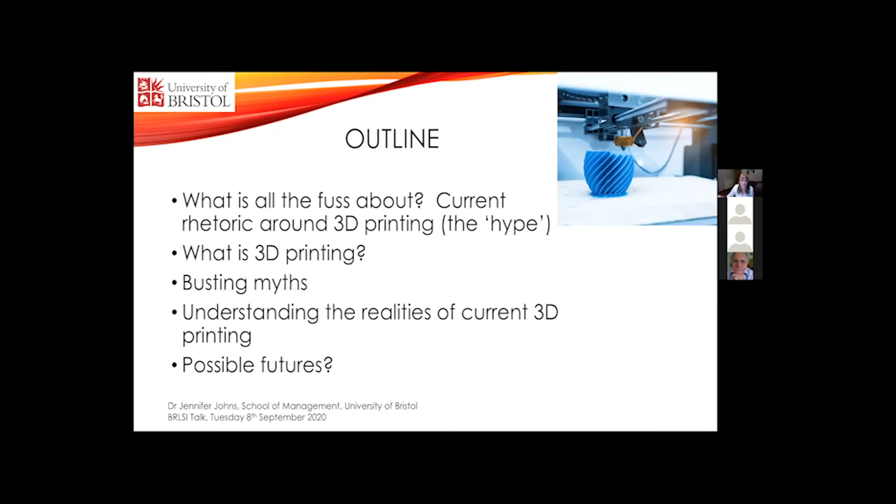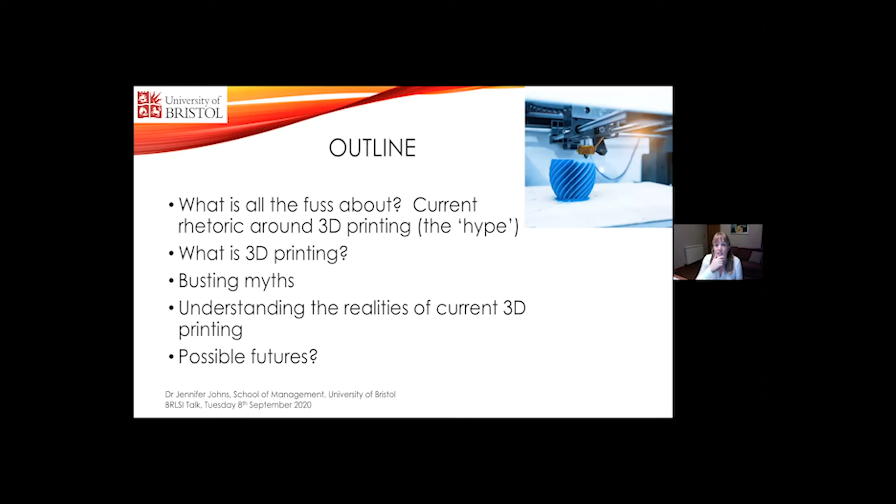There's no right or wrong answers, I think, around this. All I can do is give you my perspective based on the work I've been doing. So I want to present to you kind of a realistic picture then of what's happening in 3D printing across the different types of 3D printing production, which I'll also explain. Kind of woven through that will be the real general question about what are the futures that are facing us as a result of use of this technology.

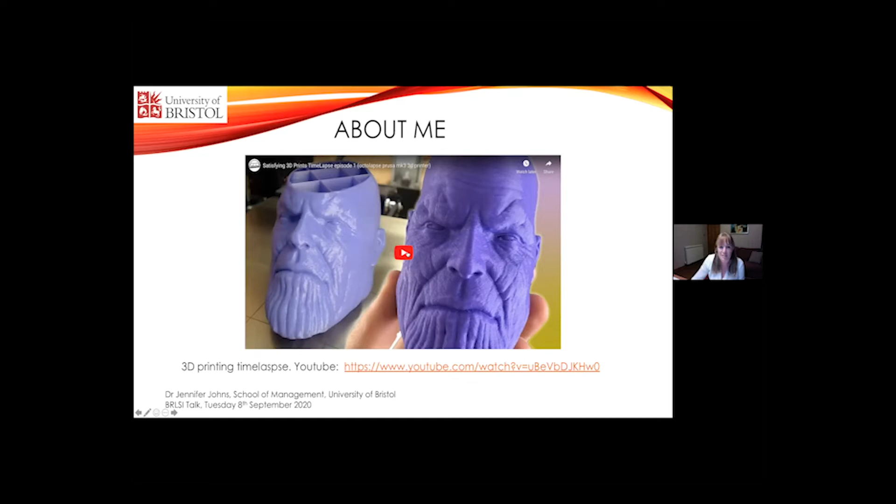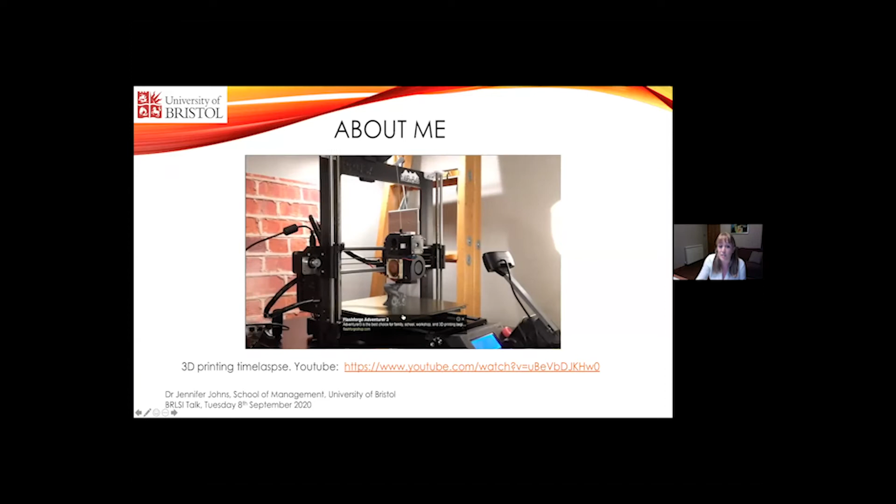So I'm going to show this video now, which we've tested and does work, but I'm going to mute it. It's going to show you some plastic 3D printing under time lapse, so going much faster than it does in real life. But during that time, I'll just tell you a bit about the research I'm doing and how I've got there. So I'll mute this, and it's going to show a 3D printer. This actually is going at the speed that it does in reality. You can see the bed moving, and that's the speed at which it printed, and this is now the faster time lapse.

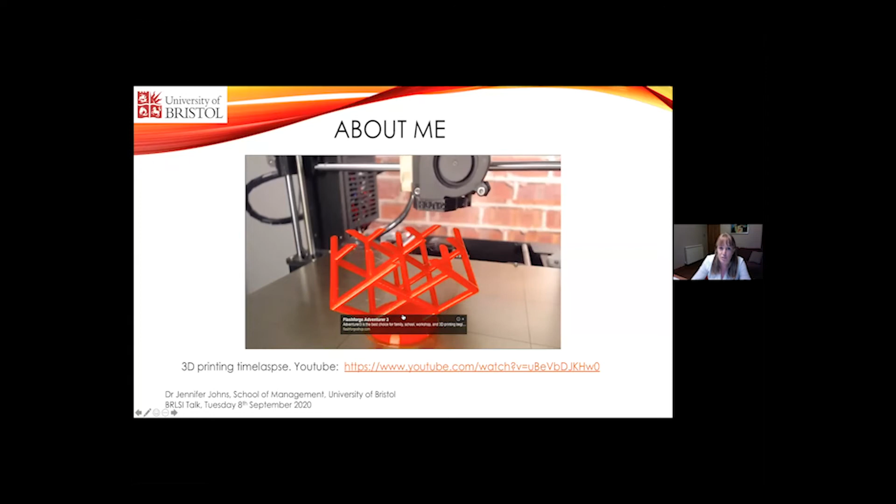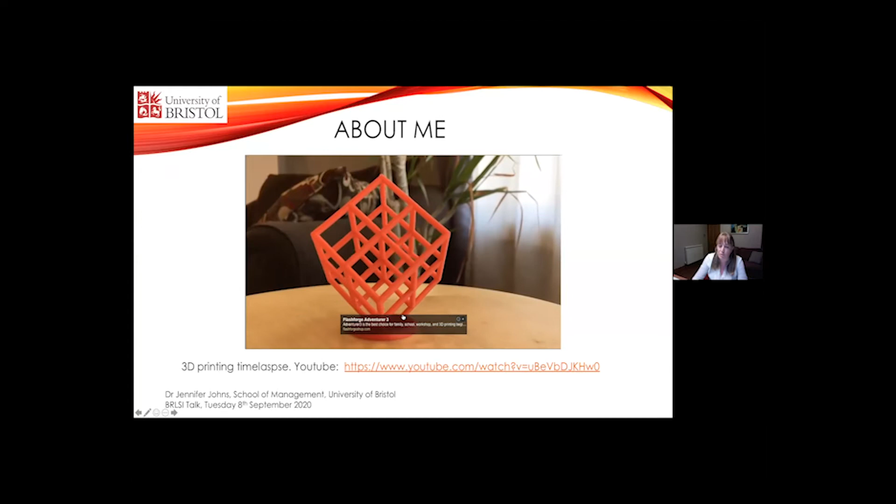So Andreas introduced me, and I teach international business. My background actually is a geographer. So I do work on globalization, looking at firms, how they internationalize in their operations. My PhD was looking at creative industries, at the film and TV industry, looking at the power relationships between different suppliers. And much of my career I've spent traveling abroad, interviewing firms and looking at different industries and understanding their dynamics.

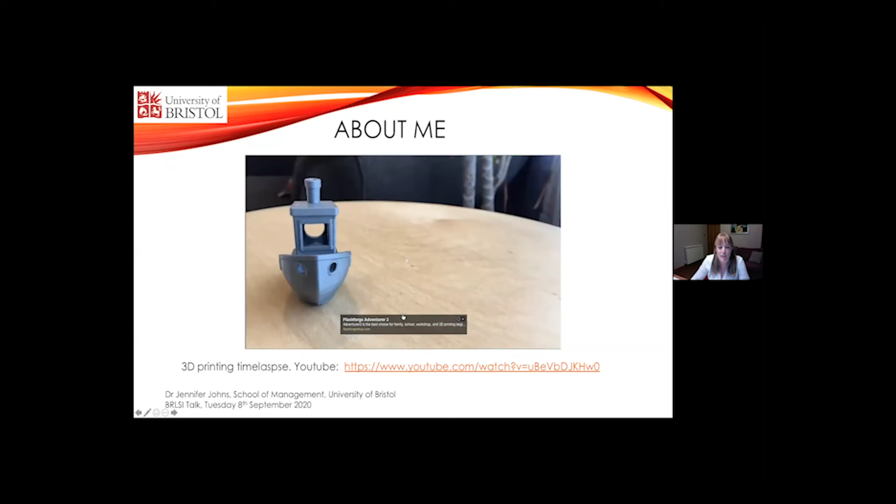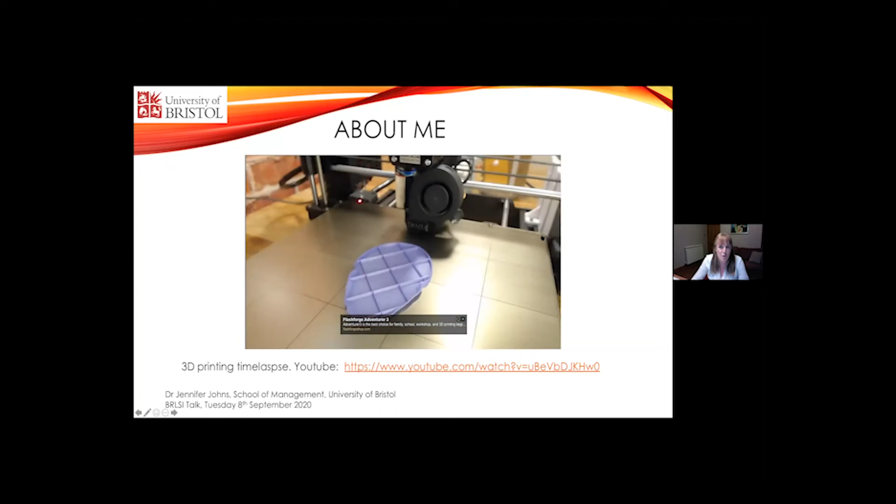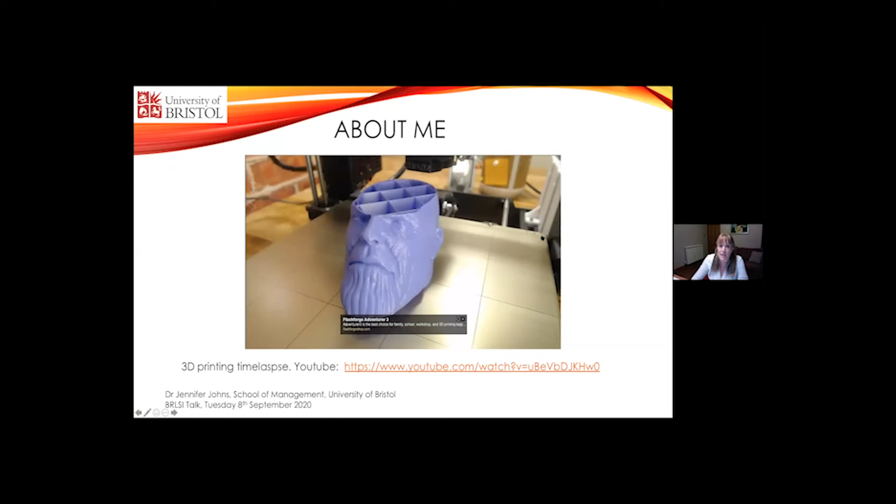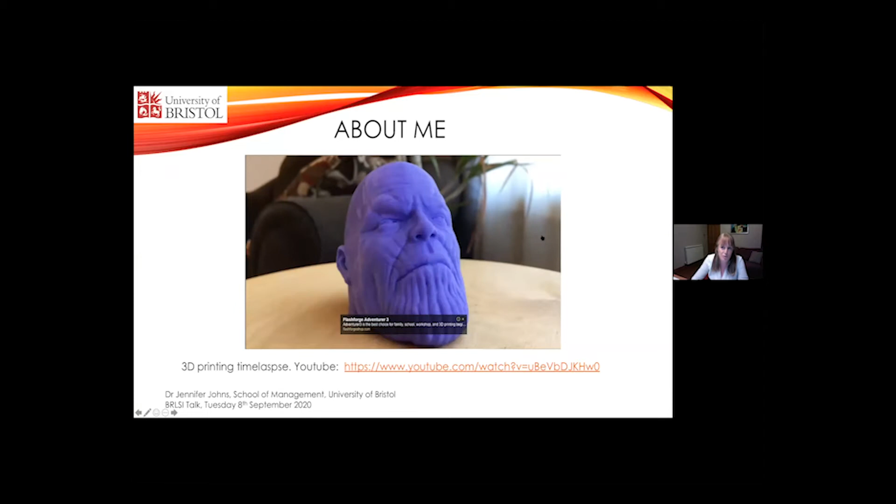I then started working in a management school, moving from a geography department, and became interested in entrepreneurship and worked with a colleague looking at makerspaces and fab labs, which, if you've heard of them, these are democratized spaces where people can go and use digital technologies, one of which is 3D printers. So I did some work on that, but then became really interested in the technology itself and became much more aware of the more dynamic changes that were happening in industrial 3D printing. So I went from the smaller scale machines that you can put on your desktop and use at home, right through to £500,000 machines that are used in industry.

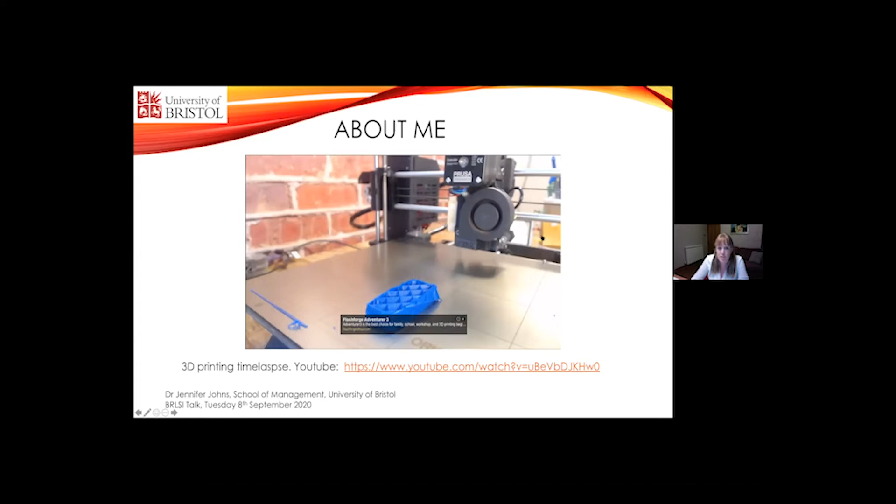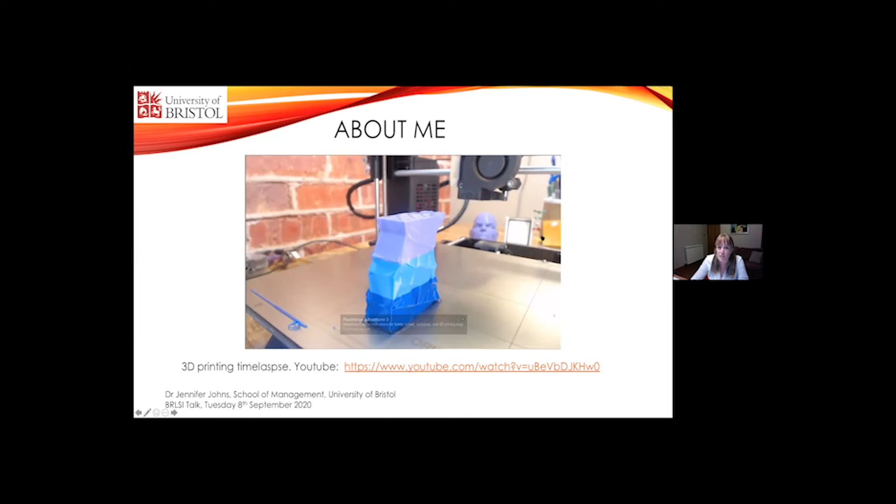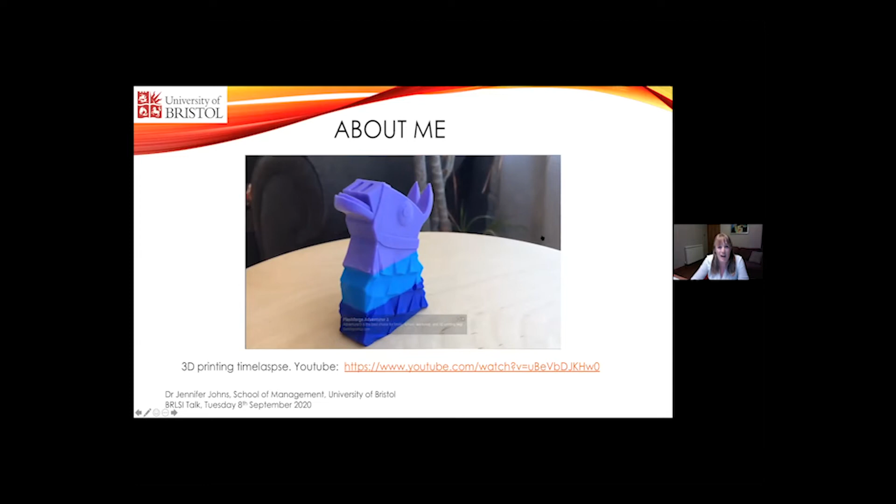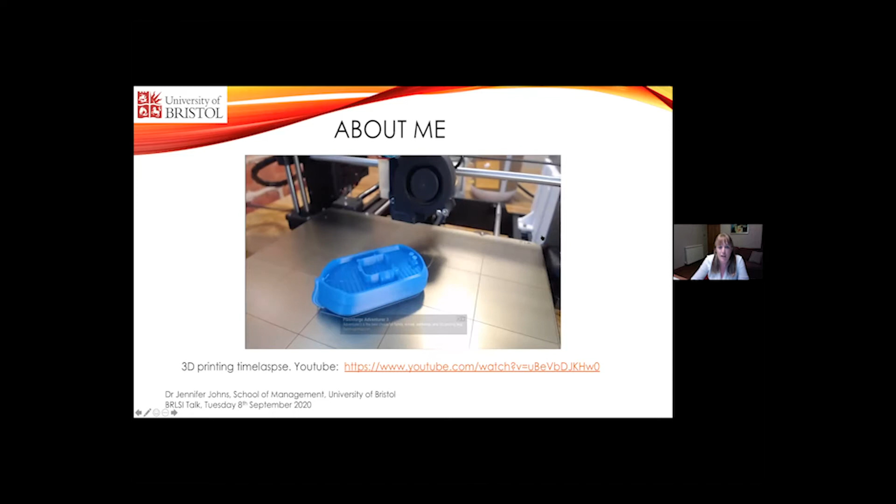So I secured funding by the British Academy to do research on industrial 3D printing. And some of those findings will come out in the presentation tonight. That involved going and speaking to 3D printing manufacturers, the people who make the machines, in the UK, Germany, and the US, in the days when we could travel. And also looking at the OEMs, the original equipment manufacturers, the big firms that are using these kinds of technologies. So firms like Airbus, BMW, GKN, all the big Formula One companies. So I did some really exciting interviews and got to go to some really interesting production sites. So this has given you a brief introduction then into this kind of building up of printing.

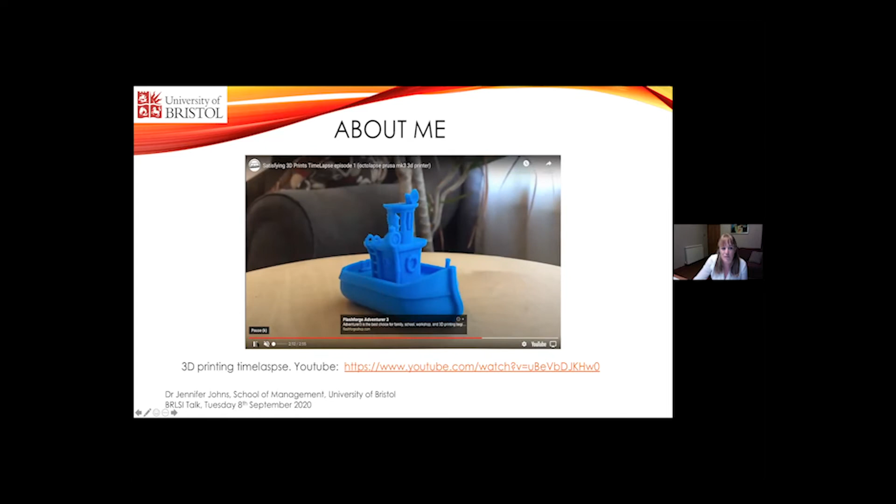I shall pause this and move on to the next slide, because I wanted to show you this short video by Ultimaker. Ultimaker are a Dutch 3D printing company, and they're quite famous because the three men who set up the firm developed the first Ultimaker in a fab lab in a makerspace. So they've got quite an open source democratic approach to how you print, and they have made a multi-million-pound business that sells globally, and their international distribution is through the UK, just north of me here in Chorley. So this is just one of their promotional videos, which might match with some of your expectations about what happens when we 3D print.

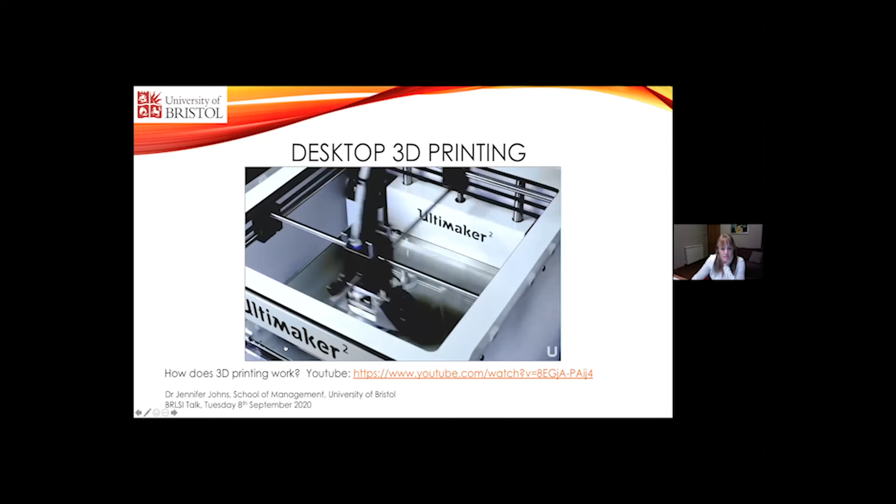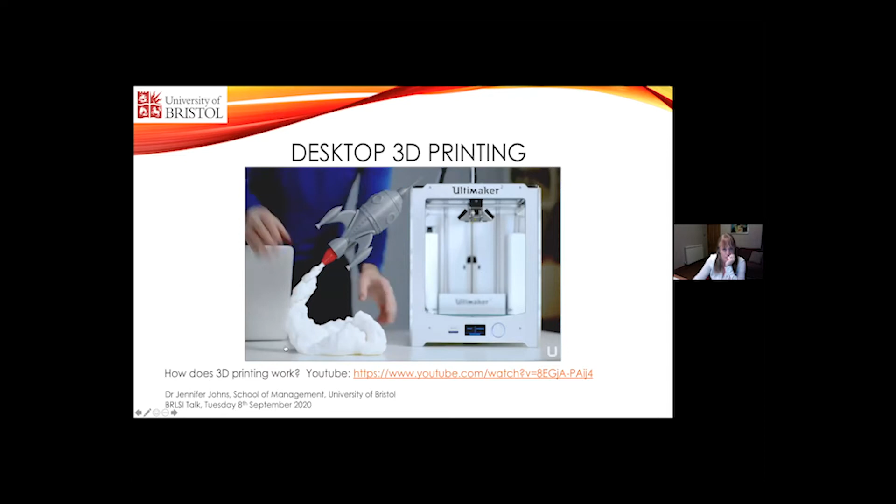And this isn't a particularly new process. Stereolithography was developed in the 1980s. So we're not talking about a relatively new process at all. And the technology's taken quite some time to develop, to the point where we have these promotional videos from Ultimaker showing us a very smooth and easy process, which in reality, many of us would struggle with either knowing the software, how to design in the software, and how to print.

And that showed him in that room as if it took about an hour to print that spaceship. In reality, it was probably about an 8-hour print job if it succeeded, and many of the prints fail. So we're presented with this rhetoric around this kind of plug and play, this very easy technology. And some of the realism I want to bring into the presentation today is about how we're not quite at that point yet, and whether we will be in the near future.

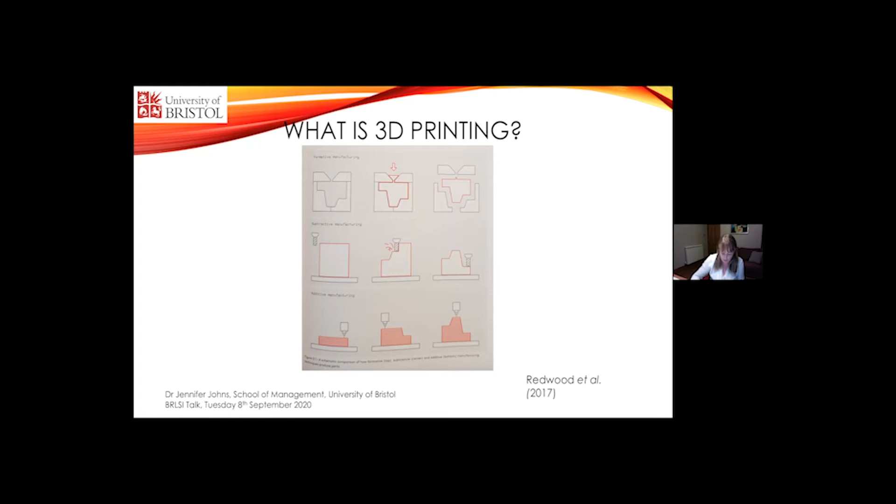So moving on then to these claims, there's 3 that I want to focus on today, and these kind of mirror some of the things that you will have heard in the media and continue to hear in the media. The first is that we will all have 3D printers in our homes. So we'll be able to source designs and print at the flick of a button whatever we need and whatever we need to consume. So this is really buying into some of those bigger ideas around a kind of Star Trek replicator machines that can give us what we want on demand. I'm going to spend some time talking about why I think that might not be particularly realistic tonight.

The second claim is that 3D printing will replace traditional manufacturing techniques. So a lot of the rhetoric in the popular media and in academia is that 3D printing will revolutionize manufacturing, and that we won't need to use traditional manufacturing methods. And that such is the scope of the capacity of the additive manufacturing that we wouldn't see a rationale for using traditional methods. Additive manufacturing has got several advantages over traditional manufacturing. Because we're adding layer by layer, it enables much more complex geometries, as they say in the industry, a lot more complex shapes that can't be produced using traditional methods.

So this means that there's the capacity to make savings in terms of weight, for example. Also, instead of manufacturing several parts that you'd put together, you can manufacture one part at the same time. So there's time savings. But also there's the ability to customize the production. So a machine can print off the same product but have a different serial number or make slight modifications to each of them. So you're completely changing your understanding of the economies of scale of production. So the people who buy into the capacity of additive manufacturing are very enthusiastic about how this could change how we manufacture goods.

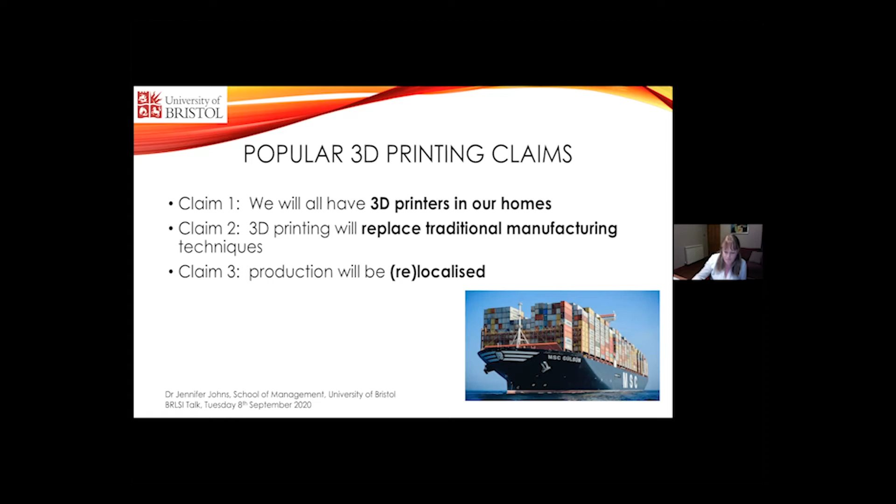So why do we have this hype? We see a lot of this, and you see it in the title of the talk, of a shift towards a new industrial revolution, a fourth industrial revolution, as we're coming out of the third. Really signaling this sea change in how goods are manufactured. That's because there are many successful ways in which additive manufacturing, 3D printing, has been adopted in the production of particular goods, and I'll talk about some of those today. And they've completely changed how those goods have been produced, which is leading to questions about, are there other goods that can be completely changed in terms of how they're produced and where they're produced. Industry is itself looking for what the next big thing is in 3D printing, and it hasn't quite found it yet.

As I mentioned, this potential for increased customization of products and potential for users to make their own designs. So in academia, we hear this term prosumers, which is merging of production and consumption. So people are producing their own goods and they're designing their own goods. So you're collapsing that relationship between the final manufacture and the design, and the idea that a single individual can do all that for themselves. And that becomes liberating, it becomes enabling for people to manufacture their own goods and to customize them. And we can think that there's some things that we would quite enjoy about this. How about printing shoes that fit our feet perfectly, or gloves that fit our hands perfectly, or clothes, for example, or even just being able to choose what color we want something to be in. There's also a bigger picture around this.

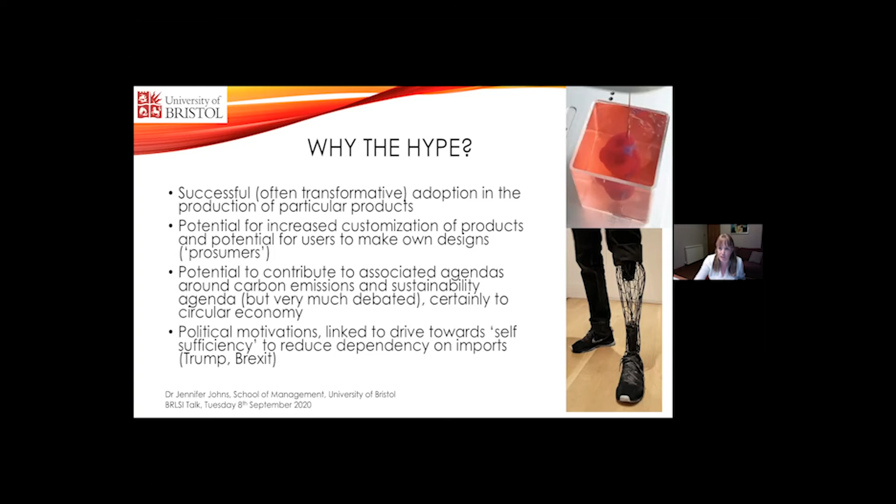So if we look at domestic 3D printing, starting in the home, we've seen the cost dropping quite dramatically. I've used the example of Ultimaker here. Other printers are available. I don't work for Ultimaker. I use this example because it's relatively widely sold and is considered to be quite easy to use. So you can see here around £2,000, depending on whether you're paying VAT, which makes this within the range of somebody who's going to use the printer at home. And we have hobbyists who would use this machine, and it's quite a good entry into 3D printing.

You'd use the software to develop your designs, and there's a whole wealth. The Internet can provide all manner of designs that you can take and share with other people. And you might typically start by printing a 3D printed chess set, for example, but people then go on to use this to develop things. They might use them for prototypes if they owned a small business, but mainly for people to produce domestically.

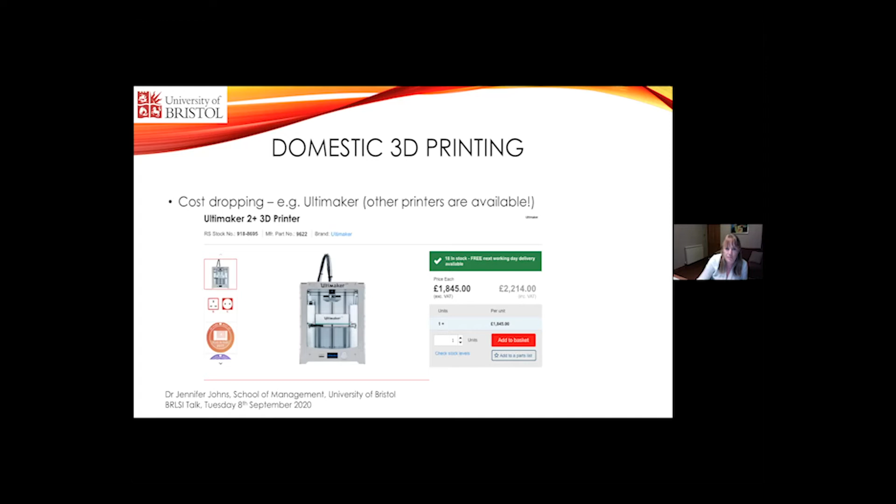Now, we see a lot of rhetoric around how we will be printing what we need for ourselves in our homes, but I put these images up to encourage us to think about the whole wealth of tools that are available to us at home and the kinds of things that we can do ourselves. We have a tool shed here with lots of woodwork equipment. We have a lathe, we have a sewing machine, and we have some vegetables.

And I think COVID's perhaps made us all think about how we could do more at home. But having these tools doesn't necessarily mean that you're going to be able to use them or have anyone to show you how to use them or have the time or the inclination to always use them. I have a sewing machine and I do sew, but I don't make all my own clothes.

So I think that we have to be quite cautious when we think about how 3D printing at the moment is something that all of us are going to be able to access. Numbers are increasing of people buying machines, but I don't think there's going to be a massive rush for all of us to be going and doing it.

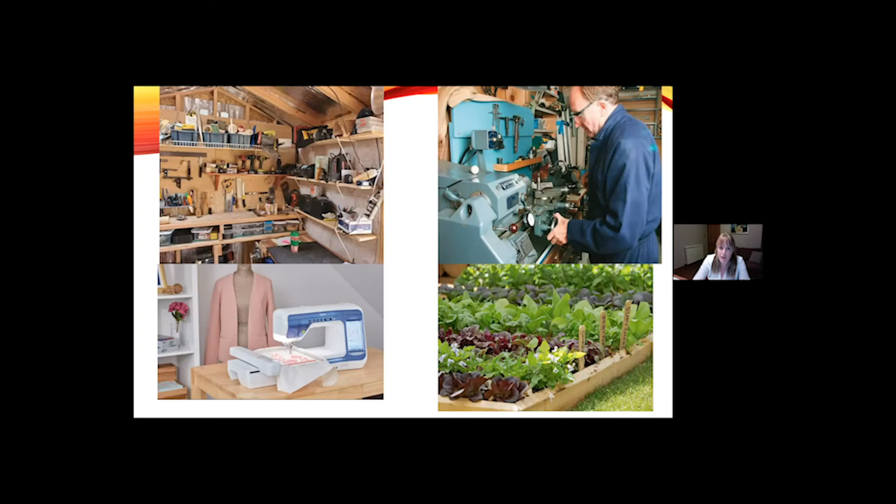One of the things that has become quite interesting about domestic 3D printing is if the machines do become a bit more accessible, a bit more plug and play, a bit more like the Ultimaker video, where you could just upload something and print it, getting more into the realms of your everyday user being able to use them. We can see that there will be room for us to print some of the things that we need.

Some things could be quite transformative in the sense of spare parts. If something small that you're using that's made of plastic breaks, you could be able to print that yourself, saving you having to have it posted to you or going and buying it.

This means that there's been a lot of talk about this term distributed manufacturing, moving away from the idea of highly centralized production where things are made in the millions, potentially thousands of miles away and then shipped to us. And that actually there's models where if we have more localized 3D printing in smaller networks, that we might be able to access this kind of smaller production as and when we need it.

So, for example, we could be looking at something like the post office network, where you have that kind of localized production, where you have something that could be within 2 or 3 miles of you.

When I was doing work on makerspaces, I was working with the Fab Lab. This is a network of makerspaces that came out of MIT in the US, which has the aim of getting people to use the technologies to enable entrepreneurs, people who are out of work, to get people with those digital skills to use these spaces for free. So I did a lot of work for them. I wrote their guide to how to set up the Fab Labs.

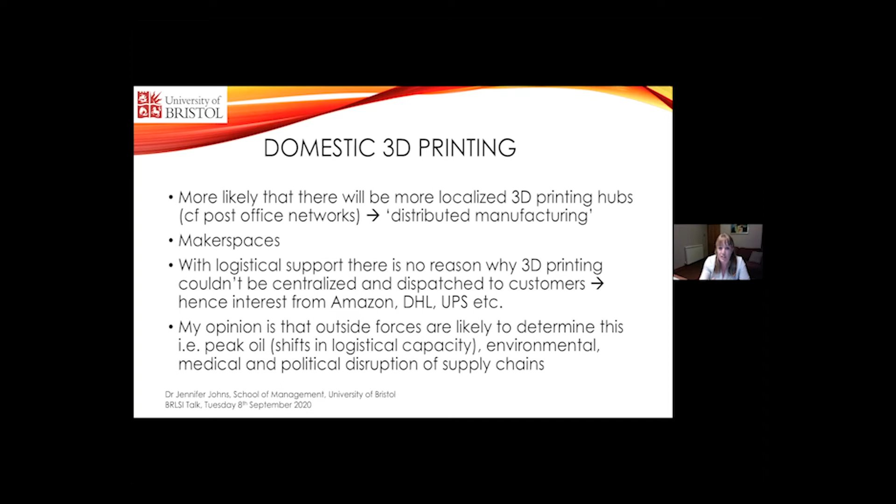But I think that actually it's more likely to be outside forces like peak oil running out, shifts in logistical capacity, environmental, medical and political disruption of supply chains will probably change those supply chains, and then there will become a role for 3D printing.

So when I talk about the 3D printing industry, the start of my research was very much on who makes the 3D printers. There's a whole range of other people involved in this now, including logistics firms, which may impact on the experience for us of 3D printing in the future.

So I want to turn now to my expertise in industry and industrial manufacturing. 3D printing in industry is called additive manufacturing. So I apologise if I've already been using these interchangeably. It causes some confusion, particularly in the press. Industry likes it because I think it distinguishes them from what they see as the production of small bits of plastic on domestic machines, because obviously what they do they consider to be much more serious.

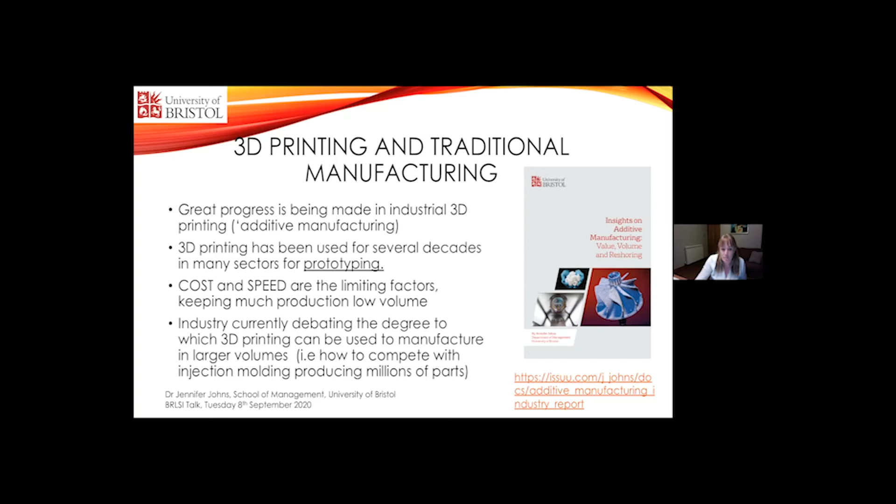So when we talk about 3D printing, it isn't one process. It's a whole array of different processes. And the industry is very fragmented in terms of who offers those different services. Now, these are all based on the slow development of the technologies over time. But as you can imagine, this creates a very complex picture for firms who are looking to produce things and might not necessarily know which are the right ways for them to access this technology and which is the right one for them.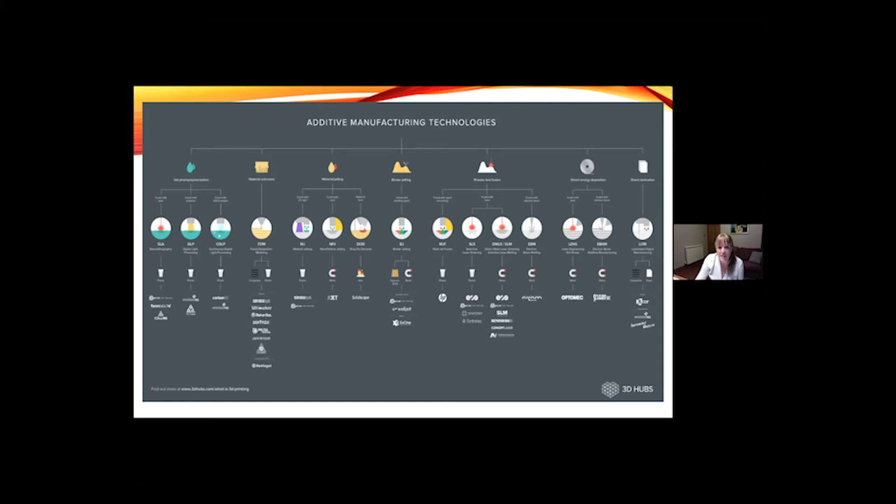So in the UK, we're very lucky to have a centre in Coventry where you can go for independent advice if you're a company, advice on which machines would suit you best. In other countries like Germany, for example, you would go to one of the big firms like EOS or SLM, and they would sell you one of their machines. So we're lucky in the UK to have this independent centre, but it needs more funding, which I'm sure comes as no surprise. So this development of different technologies has led to some quite dramatic stories, which are probably your starting point, and which is probably where you expected me to start in my talk.

The strength is in several sectors. Hearing aids, nearly 100% are now produced using additive manufacturing. And this is because every single hearing aid is customized. It's made for the individual. So every piece is a one-off. So the extra cost of additive manufacturing is outweighed by the ability to produce exactly for that person. This has happened within the last 15 years, and there's hardly any production of hearing aids using any other method.

We're also seeing in the medical sector, there's a whole range of different things that are implanted into the body, like hips for hip replacement, dental implants. The picture on the far bottom right is metal printed on an EOS machine for teeth. And this is where additive can produce this personalized production relatively quickly. And this is using a powder process, not using up too much because they're very small parts. So you can print many, many in one print on one print bed. So these small things tend to suit additive manufacturing.

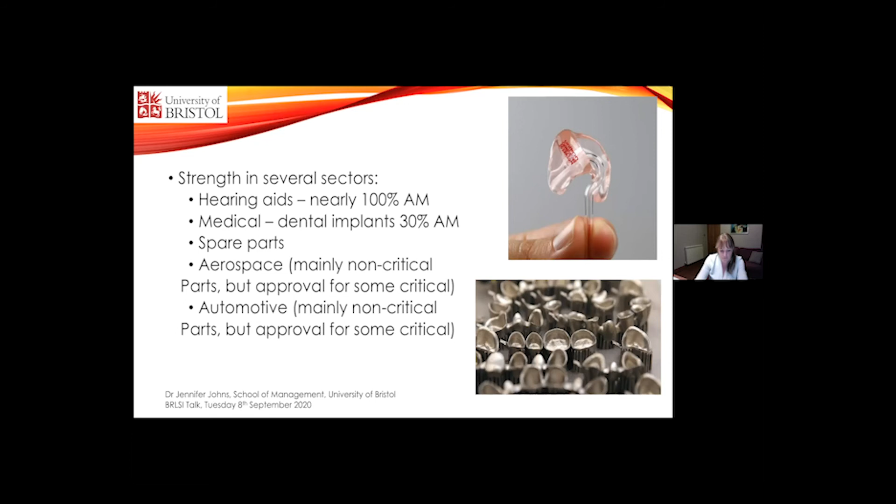But we are now seeing parts being approved for critical use in planes and cars, which is where we've seen in the last 3 to 5 years a real shift in confidence around the standards of the parts that are produced. What I would like to emphasise is that there is no overtaking of traditional methods by 3D printing. It's very much complementary. Industry repeatedly tells me 3D printing is a tool which is used alongside other tools. There isn't now in industry any suggestion of traditional methods being replaced.

The bottom example is the seat for an Airbus A380. And this is designed using 3D printing, and the mold is 3D printed, but it is then produced using metal in traditional methods. It's cast. So we're seeing the two different methods coming together. So the 3D printing is facilitating this.

That part used to be 20 different parts that were all bolted together, and now one single part is produced to make the seat. And that has provided significant cost savings over the lifetime of the aircraft in terms of the weight savings. The Airbus A380 is no longer in the skies as much and the orders have closed, but it's a very nice illustration of how these two things can work together.

The example in the top is BAE Systems Eurofighter. They will set up a whole production line using a mixture of different methods, mainly conventional manufacturing, in order to produce, say, 30 fighters for the RAF. They may then have an order come in from Saudi Arabia who want 5. And the setup of the aeroplane has to be different. They want different range, they want different weapons, which changes all the insides, all the gubbins inside the plane.

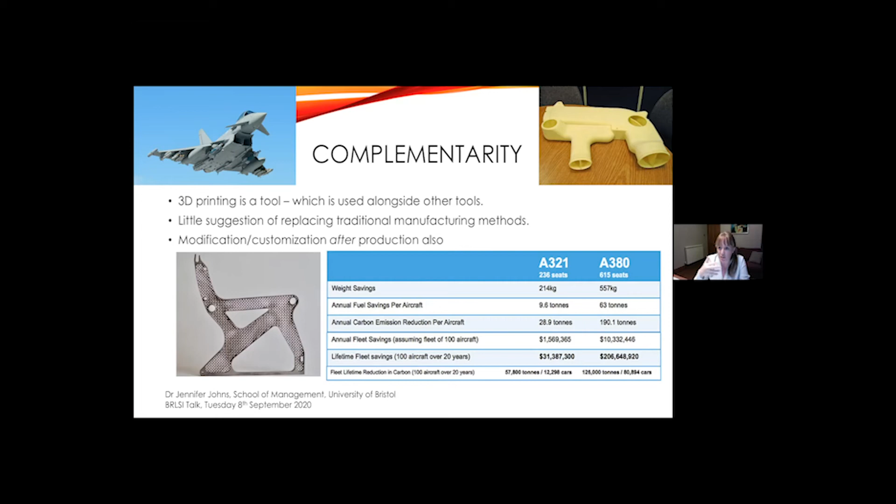So the picture on the far right is part of the cooling system. And that part is 3D printed because it's not cost effective to change the production line. It's much more effective to just produce 5 of those using additive manufacturing to fit into the new configuration. So it's really supporting the subsequent production, using a different production without setting up a whole new production line. So very much in complement.

So I wish I had more to tell you about the third point about relocalization. It's what sparked my interest in 3D printing, the change in the geographies of where we produce. But we're still actually just seeing limits to changes to domestic production. There's not yet any evidence of things coming back from the Far East, even under COVID conditions. We're seeing some small-scale bespoke production and smaller production lines are more likely to remain in advanced economies rather than going to low-cost locations. But in the sense of bringing back quite a lot of manufacturing, we're not seeing so much of that.

There are some concerns around, well, have we got the ability to do that manufacturing here ourselves anyway, particularly in the UK, where industry feels very neglected and underfunded for several decades. And the sense that Europe and the US might be leading at the moment in terms of 3D printing technology, but with the levels of investment that's happening in Asia, we can't be complacent that that's going to continue. And it might be that you go to Asia to get the expertise in 3D printing, which I hope not, but it's possible. And also we have to remember that things are geographically and sectorally uneven as well in terms of the types of things that can move or will move and where they've moved from and to.

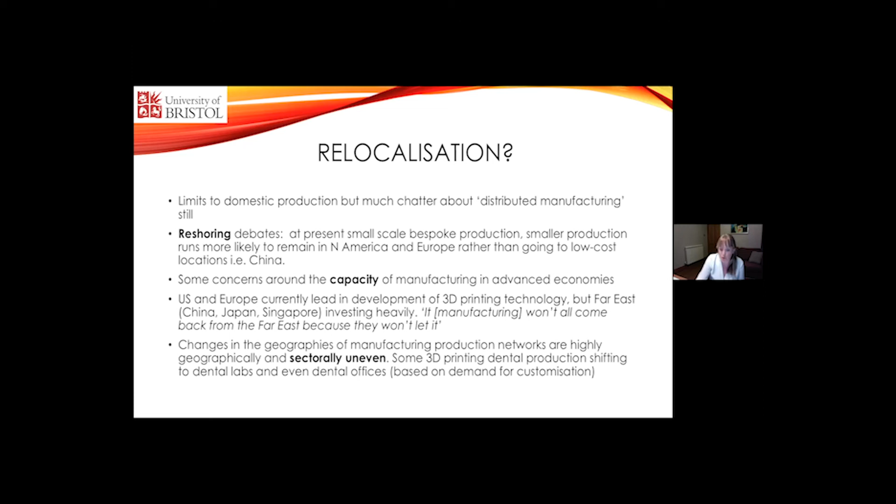So to summarise, because I'm conscious I've probably gone over because I could talk all night about 3D printing, being a bit more realistic about where we currently are with all this huge rhetoric, the scale of domestic production is still currently limited. I think that we haven't seen the change in consumer practices that we would need for that to be more universal. 3D printing is a set of processes, not a universal process. So this is the first step in people realizing what we talk about when we're thinking about 3D printing: there are actually multiple different ways of 3D printing in a whole range of different materials, including biomedical. There are advances being made in speed, size, and the material for printing.

And these advances around the materials is actually where quite a lot of the excitement is. Less about the nuts and bolts of how we 3D print, but what we 3D print with, and getting to the point where we can talk about printing in multiple materials at the same time, which is where we could start to embed electronics in things while we're producing. I think the status quo of capitalism and the existing supply chains are really limiting the potential for radical and transformative changes. And I think that's what I was trying to hint at when I was showing you how logistics companies are becoming interested in this technology.

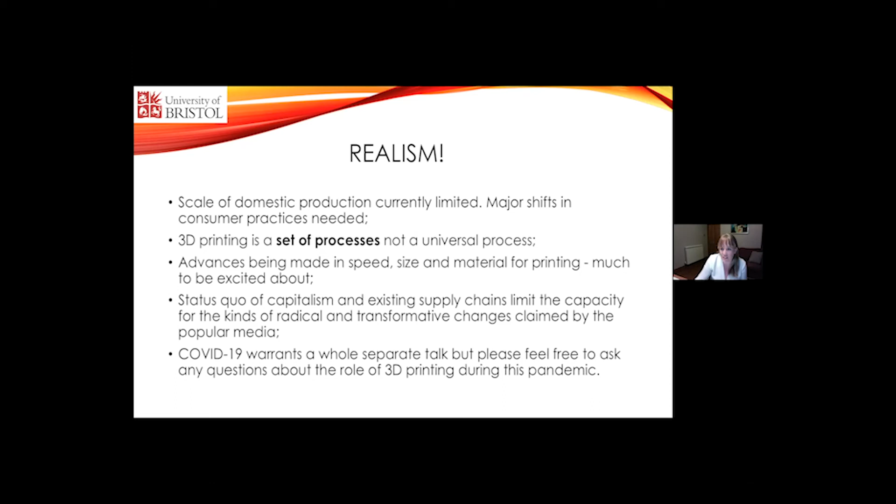I didn't want to spend too much time talking about COVID-19 because I felt it would give us a slightly skewed perspective on 3D printing. But I do have some knowledge about what's been happening in the pandemic. So I thought I'd leave that up to the audience if there was something they're particularly interested in. And many of my answers will echo the picture I've already given you of 3D printing today. So I will then open up to questions.

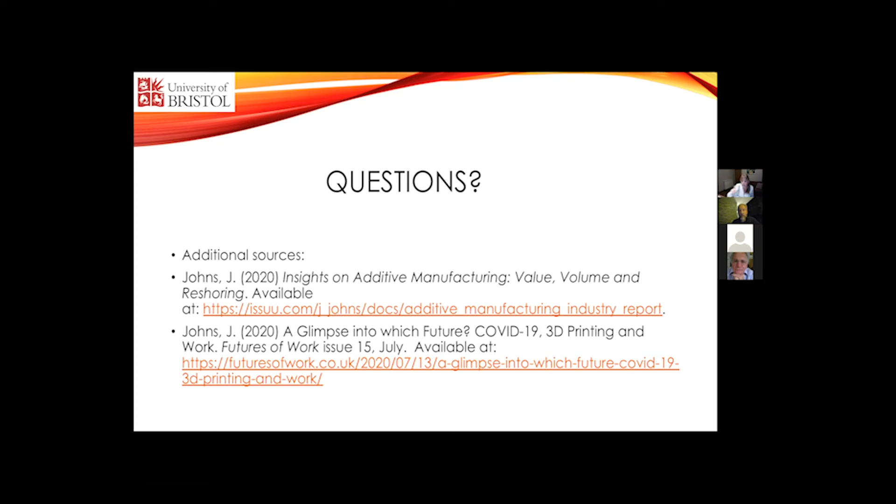I really thank you for giving us a very erudite tour de force across 3D printing, not just in terms of personal use, but also industry and the different facets involved. I think it's been fascinating. From what you're saying, Jennifer, 3D printing isn't going to take over and change the world just yet, but it's a very useful tool in industry, especially in design, even if it's not used for manufacturing. It's in different stages of the process. It has a role to play and is making life easier.